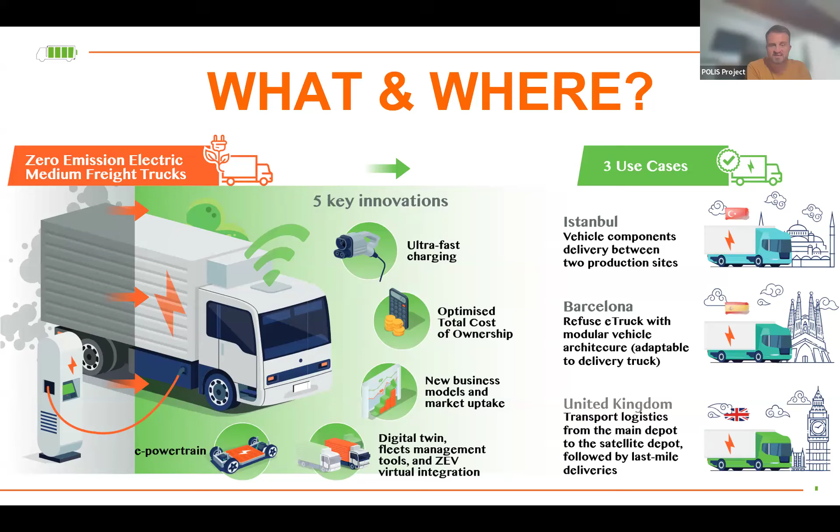We are coming to the end of the project, and we are celebrating our NextETRUCK final conference, where we celebrate the deployment of medium-sized electric trucks across Europe. This final conference will take place on the 28th of September in Brussels, as part of the Connecting Europe Days. It's a joint event organized by DAF and Ford Otosan, since these are probably the vehicles that will be displayed there, and by us from Polis.

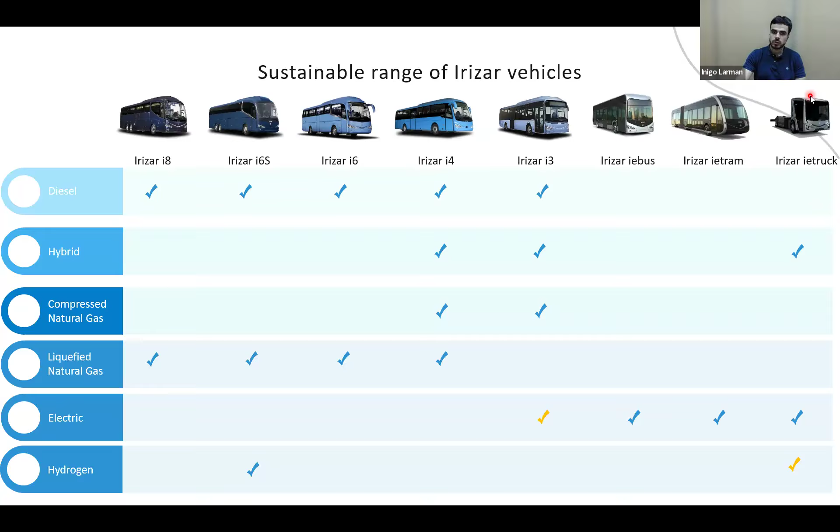This is a closer look at our fully electric portfolio. Now let me focus more on the electric truck, since this is the main focus of the NextETRUCK project.

The Irizar electric truck started as a project as a refuse collection truck, in collaboration with FCC, which is Spain's biggest refuse collection private company. They operate all over Spain and have most of the contracts with different cities. So it was a big partnership between Irizar and FCC, and that's how the electric truck project was born.

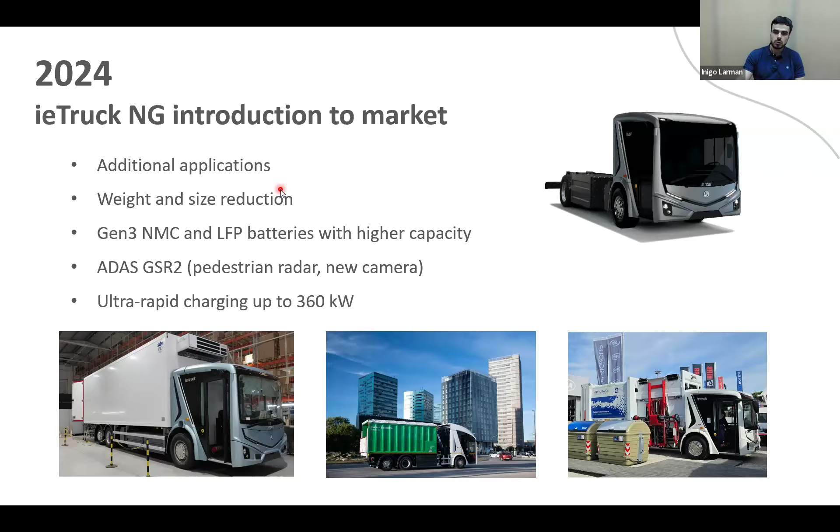Fast DC charging of up to 360 kilowatts. We offer two types of battery technologies, either Gen3 NMC for maximum energy density, or LFP batteries. With this second generation, we reduced the overall vehicle weight by over 1 ton, and we also made it more efficient, so the range was bigger with the same battery size.

Here we can see different second generation Irizar trucks in different use cases, for example urban transportation of goods. They can be cooled or at ambient temperature.

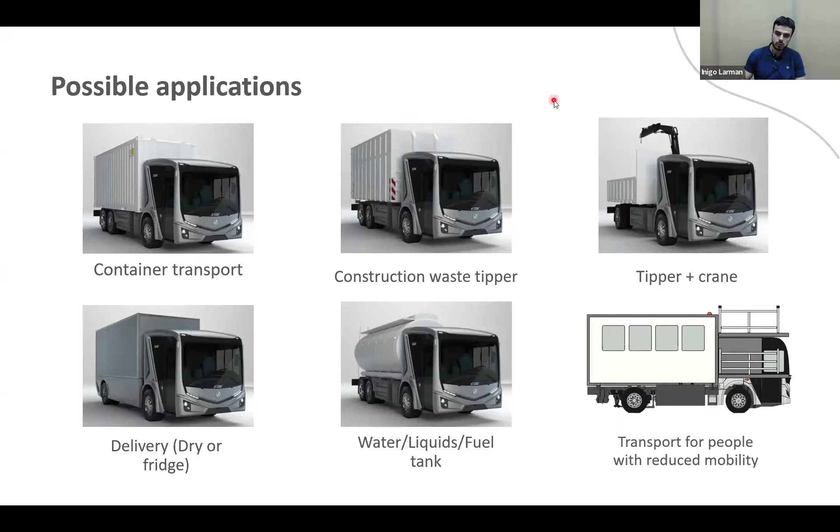As I mentioned, one of our strong cases is that our platform is very adaptable. For example, here we can see a use case where we can transport liquids such as a fuel tank, water, transportation of people with special needs, propane, etc. So our platform is very adaptable to different use cases and needs.

And here you can see pictures of real trucks that we develop and that we have already manufactured, which are already in operation with different applications.

Here you can see more pictures of different applications. For example, this truck is a refuse truck working in Switzerland. This is a truck working in San Sebastian. This one's a refuse truck working. This one's one of the first generation trucks that we started working in Barcelona, and more Barcelona trucks with different body configurations.

So what are some features of our electric truck? It's 100% electric, built from the ground up to be electric. We didn't take an existing diesel truck. Instead, we designed a truck from zero, taking into account that it'll be electric, so we optimized everything for electric mobility. We also used the same technology and architecture already being used in our electric buses, so our truck technology has been tested and validated over 1,500 electric buses currently operating all over the world.

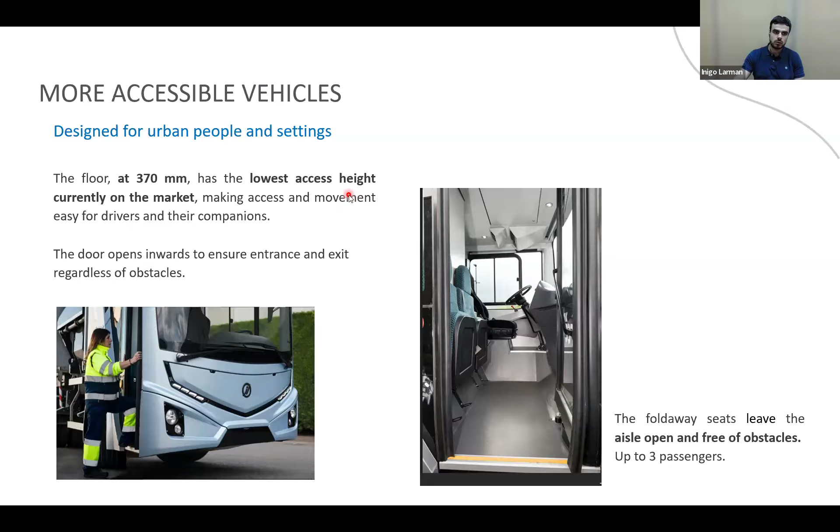Since the cabin is very low and it's all glass, the view is very good, with over 200 degrees of field of vision. So it exceeds what traditional truck manufacturers deliver, because their cabins are higher and their degrees of vision would be lower.

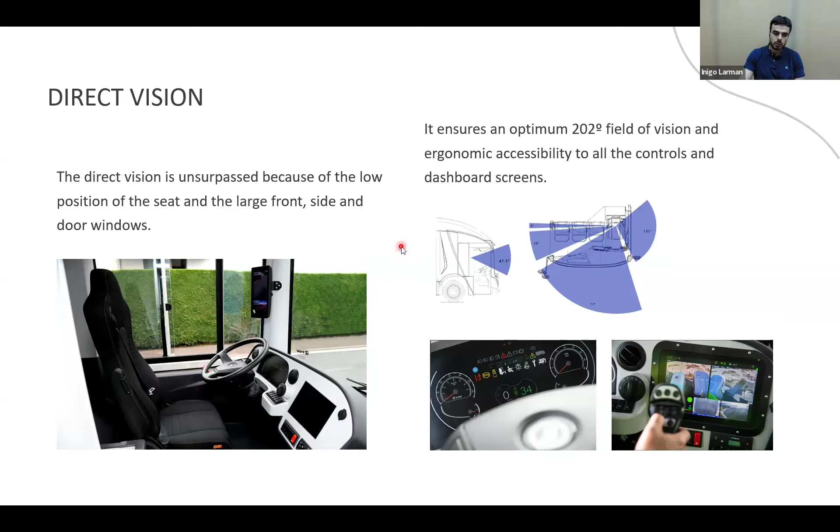Also, one of the key aspects of our truck is maintenance. In traditional trucks, the entire cabin has to tip over to access the motor and powertrain components. However, our cabin stays fixed, and we have big side access doors where a person can get inside and access all the components for easier maintenance, thus lowering the total cost of operations.

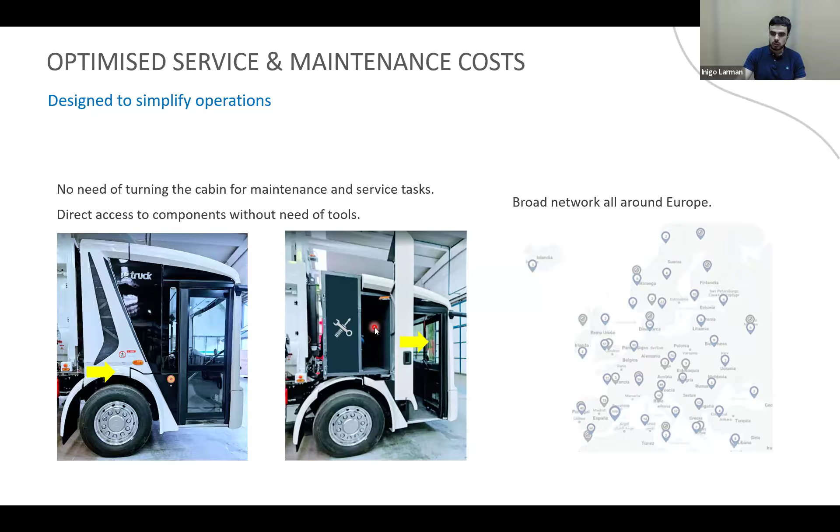One of our key advantages is also the energy storage management. We develop in-house the battery technologies that we integrate in our trucks. All the NMC technology batteries are developed by Irizar and also assembled here in the Basque Country in the north of Spain. So we control the entire supply chain from start to finish in the batteries, which is one of the most important components for electric vehicles.

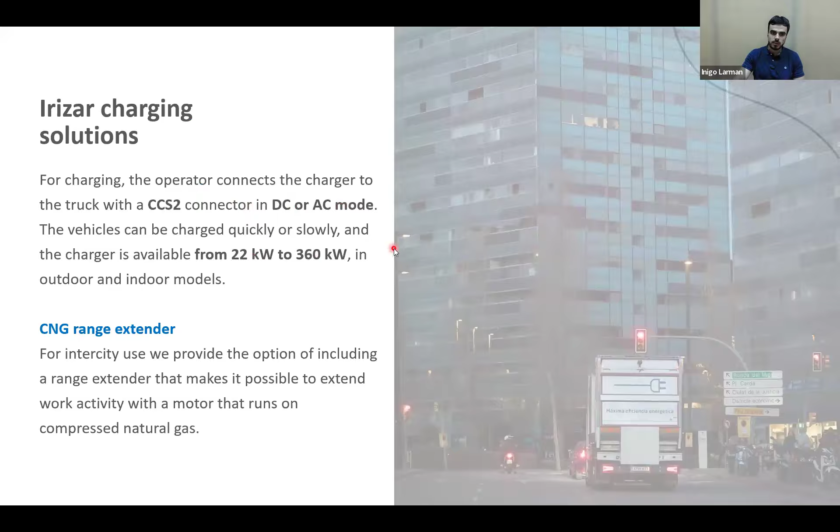We also offer charging solutions. Our partner Jema, part of the Irizar group, offers different charging solutions. Our truck can charge in either AC or DC mode, up to 360 kilowatts. So partnering with Jema, when we sell or deliver trucks to customers, we can sell them as a package, both trucks and charging infrastructure. Here you can see some of our trucks using our charging infrastructure supplied by Jema.

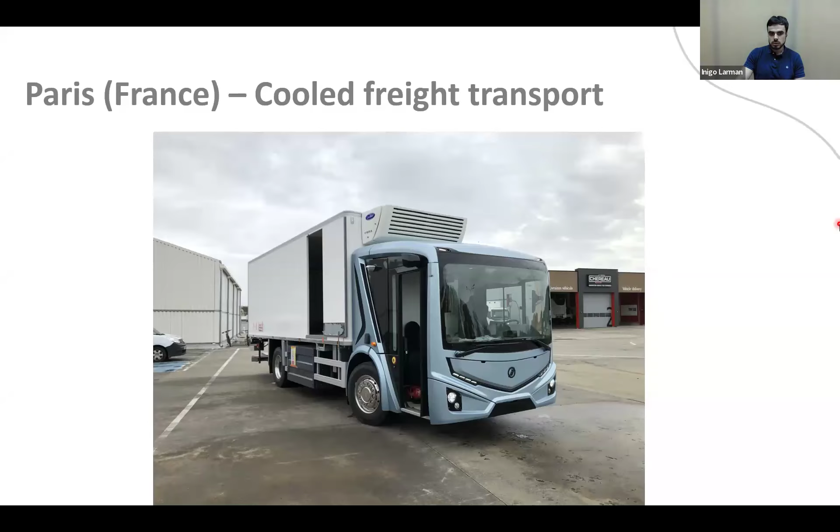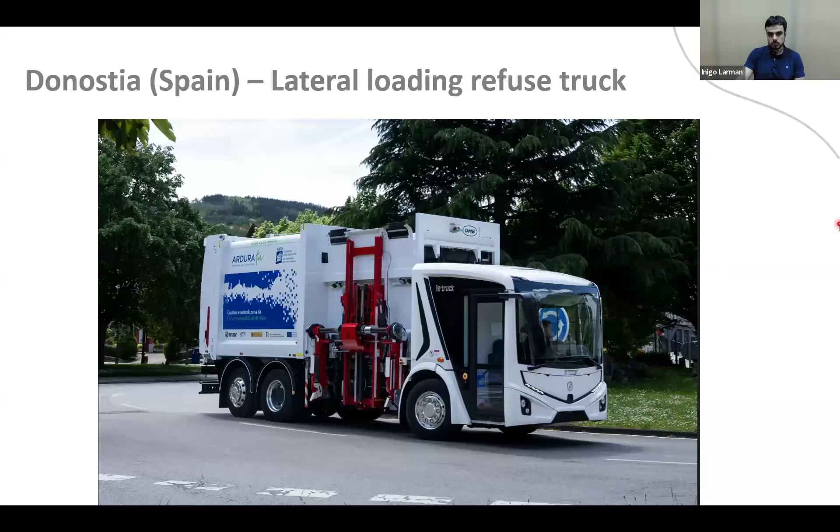Now let me introduce our partnership with NextETRUCK and our involvement with the NextETRUCK project. I'll show first a video we took with the Barcelona use case pilot.

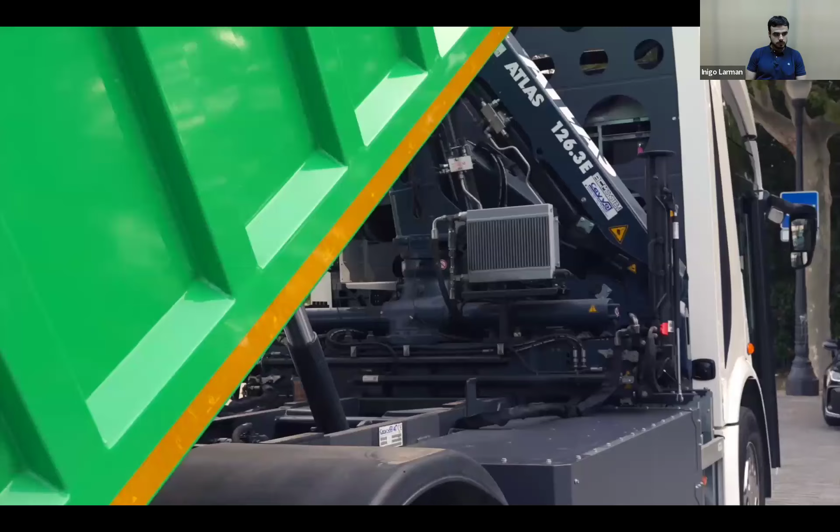This is a common problem, the audio is not being transmitted. Maybe we can show it at the end again, because we can't hear anything and the connection isn't perfect. The connection is not good. Okay, but yeah, we can maybe show it at the end again, and check the settings while we look at the other presentations, because it demonstrates the use case really well. Okay, no problem. Let me continue. Can you see the screen, right? Yes, all good. Perfect, good. Okay.

So some of the truck features that we deployed in Barcelona for the NextETRUCK use case: it's a first generation ie truck already working in Barcelona. It has a 4x2 drivetrain, meaning two axles and one driven axle. It's an N3 category, ranging from 16 tons unloaded up to 20 tons loaded. The bodywork configuration is a tipper open box, so the box can tip for unloading, and it also has a hydraulic powered crane to pick up heavy objects and place them inside the open box.

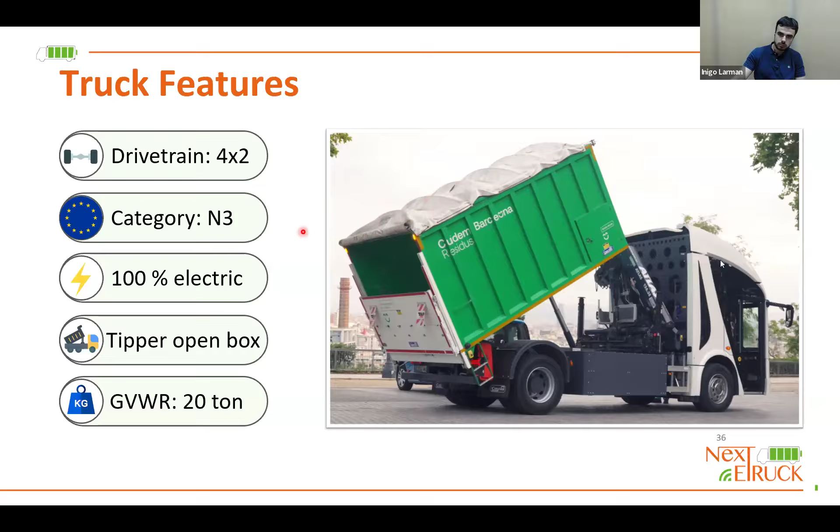What we did is take this existing truck that was operating in Barcelona, and we updated the hardware with different improvements and innovations developed for this NextETRUCK project. One of the main upgrades was updating the NMC batteries to our latest generation, the third generation. This change massively improved the range of the truck because before we had 170 kilowatt hours of energy with the baseline truck, and after the upgrade we improved onboard energy by 80%, going up to 307 kilowatt hours.

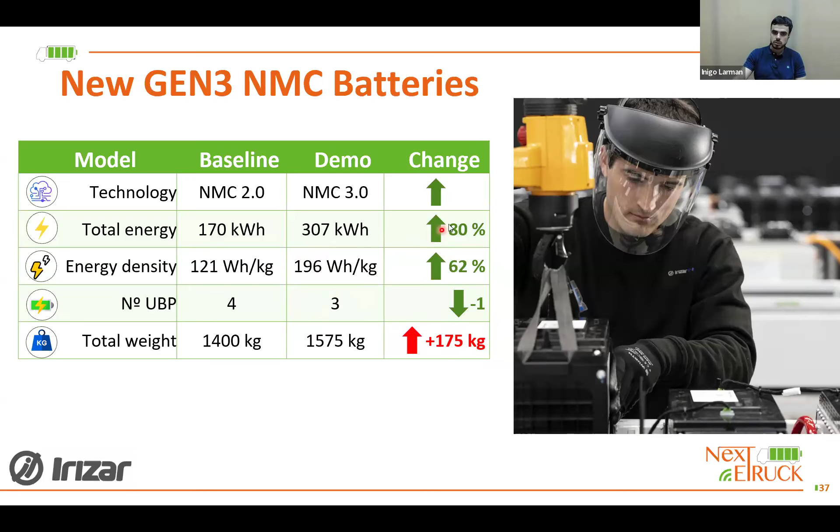These new third generation batteries, developed in-house by Irizar, provide a 62% increase in energy density, and also changed the number of batteries. Before we had four battery pack units for the baseline truck, but with these new batteries, which provide more energy, we only needed three battery pack units. However, since these battery packs have more cells and are more densely packed, the total weight of the batteries increased by about 175 kilograms. This increase in weight was well worth it because the energy increased by over 80%.

What's the advantage of having two systems in one? First of all, the number of parts is lower. Before we needed two compressors for cooling each system; now we have one shared compressor, which is enough to power both systems. This means that with just one compressor, the thermal energy consumption will be lower, and also the weight decreases by around 60% thanks to the integration into just a single system.

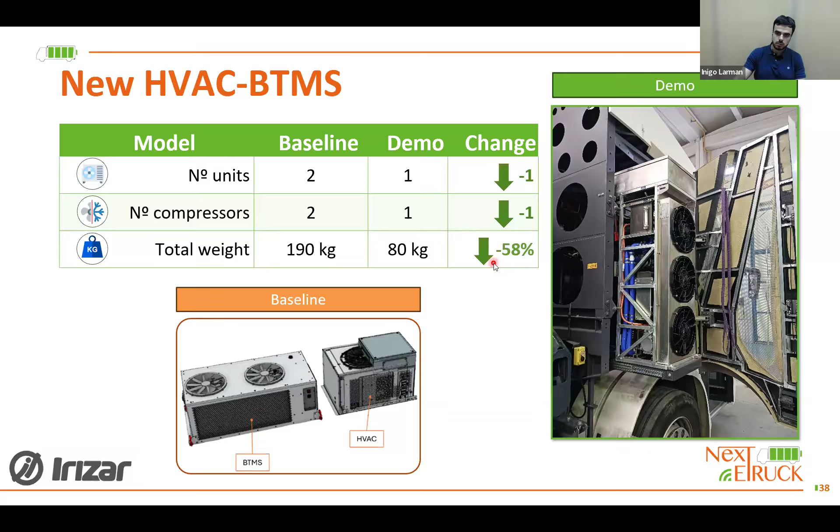Another innovation we introduced was the digital twins for the BTMS control. These digital twins were developed by Tecnalia, and our colleague Beñat Arteta will talk about the details of how they developed this innovation for the project. I'll give the stage to Beñat now so he can tell us more.

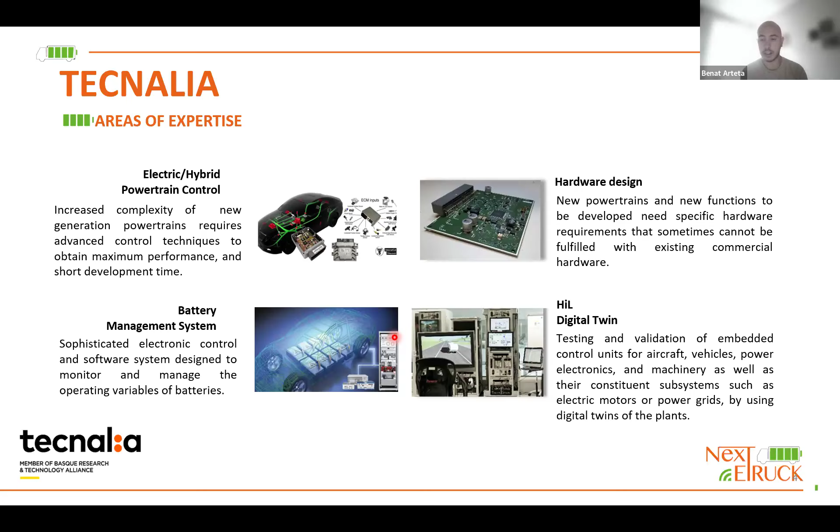With all of this, we have been implementing solutions using methodologies such as hardware in the loop and digital twins. More specifically, I am specialized in digital twins and model-based design, based on MIL, SIL, HIL, or online real-time digital twins, such as in this project, and also cloud-based data logging, computing, and monitoring solutions.

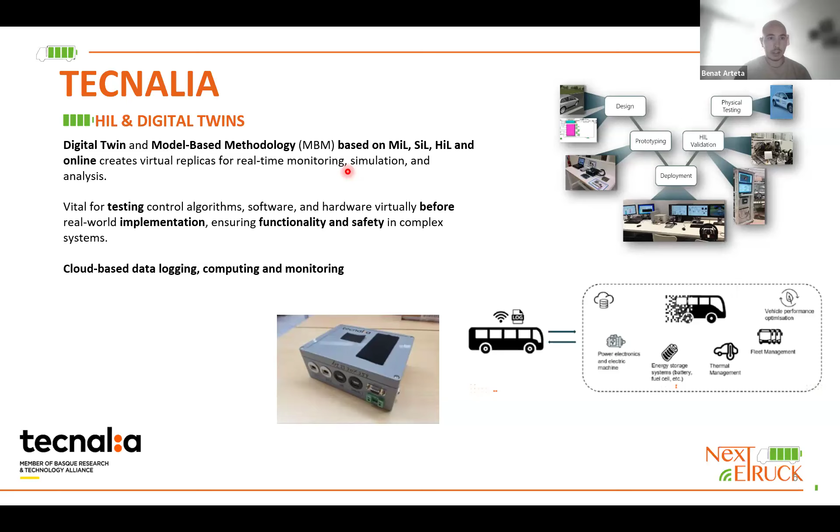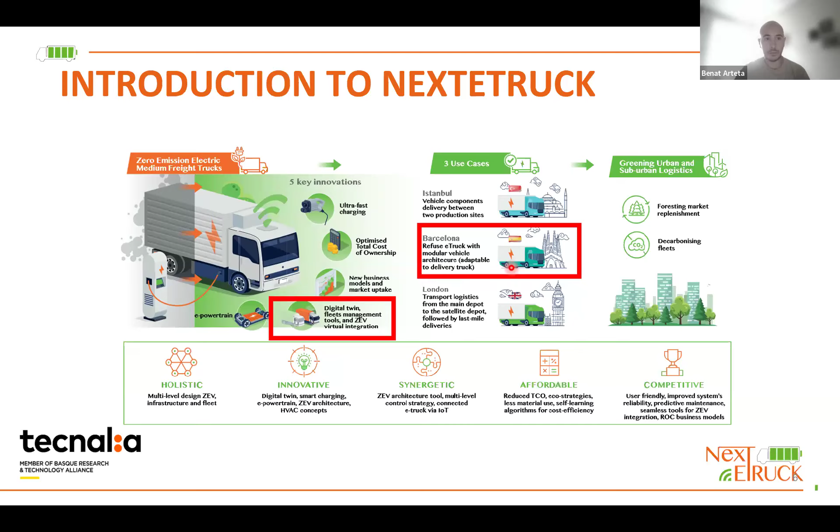So, a brief introduction of what we have been working on within the NextETRUCK project. From Tecnalia's side, we have been working with Irizar on the digital twin of the vehicle, more specifically for the Barcelona use case. The objective from our side was to reduce the truck's energy consumption, and more specifically we focused on the auxiliary systems in the battery thermal management system. To get that energy reduction, what we analyzed and developed was how to get an optimum battery set point temperature.

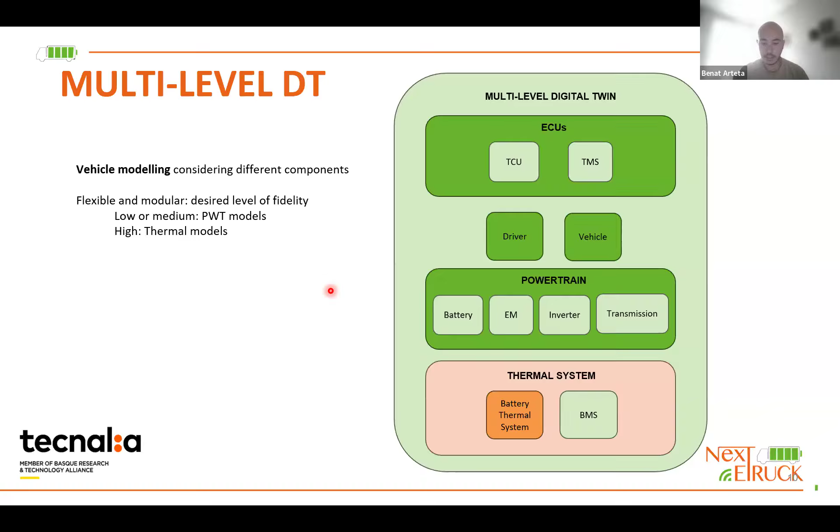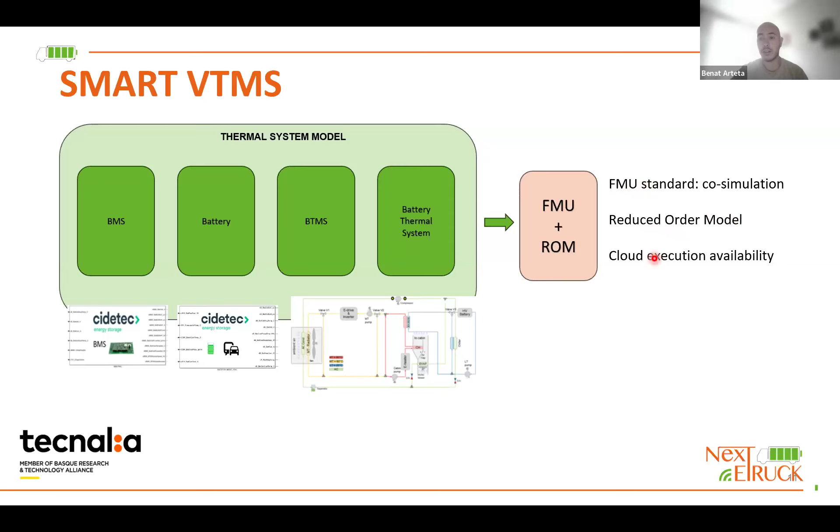So this is the smart VTMS for the part of the thermal system of the vehicle. This solution has been carried out with the collaboration of CIDETEC, which has developed the BMS and the battery FMUs, and the BTMS and the battery thermal system we have developed internally with collaboration with Irizar. And with all of this, we have created the FMU standard for the co-simulations of the different components, and also the reduced order model ROM for the cloud execution availability.

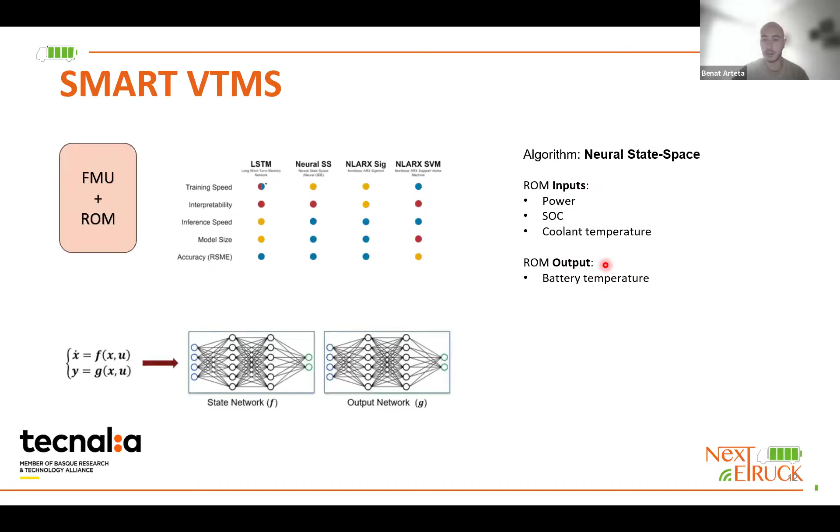In this ROM, what we have applied is an AI solution with neural state space algorithm, in which we have power, SOC, and the coolant temperature as the inputs for the ROM model. And with all of this, what we get as an output is an optimal battery temperature.

This development has been validated in two stages. First of all, we did it in a hardware-in-the-loop solution, integrating the multi-level system control and the thermal system models inside the real-time machine, which is the SpeedGoat from MathWorks. And once we validated in the real-time machine, we did the same validation in the cloud server of Tecnalia Katea.

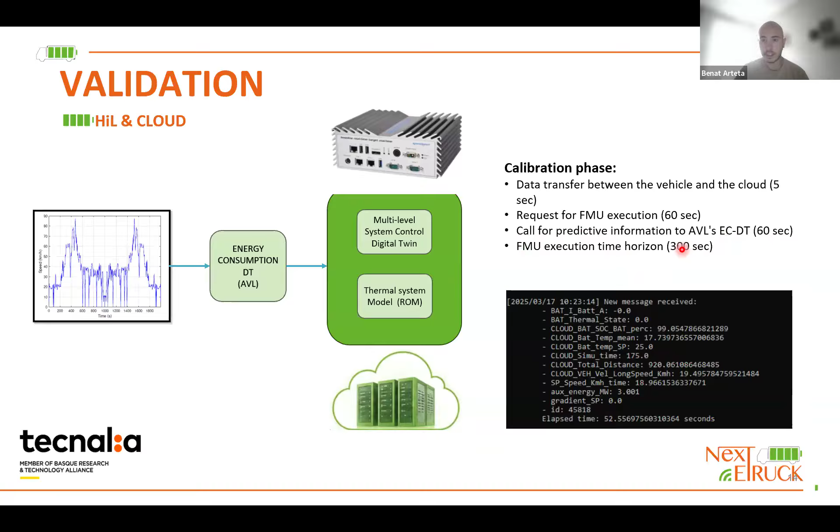For the validation stage, we did a calibration phase in which we have to take into account the execution time that is required for the solution. We have established the data transfer between the vehicle and the cloud at 5 seconds, the FMU's execution at 60 seconds, and the call for the predictive information to AVL's energy characterization digital twin also at 60 seconds, and the total FMU execution time horizon at 300 seconds. So once we have calibrated all these different phases, we have reached these results.

So we have here two different images. On the left side, we can see the Barcelona use case profile used as an input for the solution without an optimal battery temperature set point. In this graph we have the BTMS compressor electric power used. We can see that the maximum power required is around 1,300, and it's activated at around 300 and a half seconds.

And on the right side, we have the same profile from the Barcelona use case, but in this case we are using the optimal battery temperature set point. In the same graph, we can see that the compressor is activated later on the x-axis, which is the time of the drive cycle. It's now activated around 650 seconds later, and the maximum point of the electric power is less. So with this, we conclude that using this optimal battery temperature set point will reduce the consumption of the auxiliaries, such as the battery BTMS system. We consider this part of those auxiliaries.

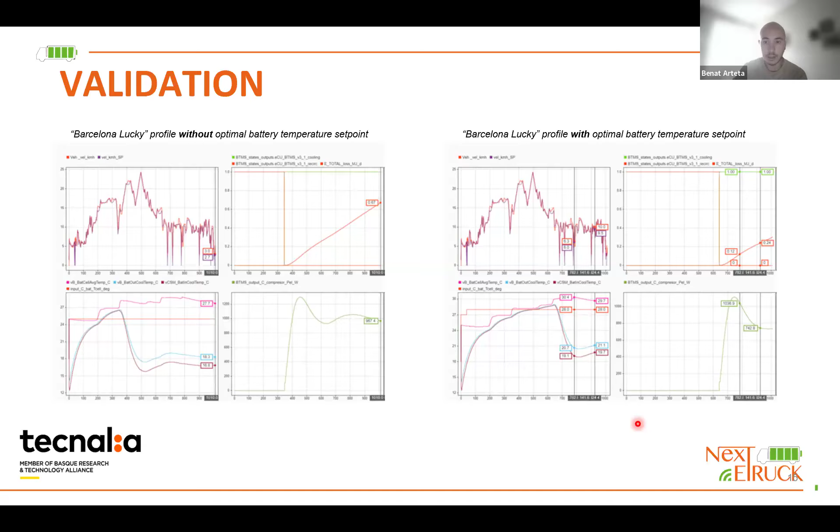So when we finish the validation part on the HiL and the cloud, we integrate all of this in the vehicle, in the Irizar's vehicle in the use case, having on one side the logistic planner to know the route and the AVL characterization for the power prediction of the vehicle in that specific route.

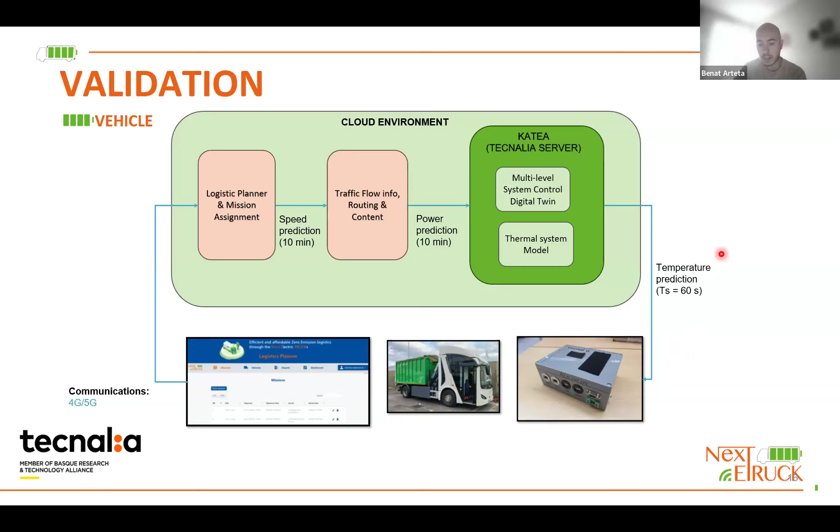We have executing KATEA Tecnalia server, which does a prediction of the optimal battery temperature that goes through wireless communications, 4G and 5G, and enters in the vehicle through the IoT device. And in this case, the final results of the operation is going to be explained by my colleague Inigo from Irizar. So this is all from my side.

Inigo, the floor is yours. Maybe you can explain further the vehicle generating results. Okay, thank you very much, Beñat. I'll continue with the presentation.

So yes, Beñat was talking about the digital twin that was being executed on the cloud server and how the truck would communicate with its servers. And one of the devices, or the input devices, that the driver could communicate with these digital twins was the IoT-based navigation.

Another change that we performed in the Barcelona use case: FCC, the refuse company that would operate this truck, already had several electric chargers. However, these were only 50 kilowatt chargers. For this project, one of the innovations was about electric chargers, and our partner Gemma installed 180 kilowatt chargers, more than 3 times the power capability of the original chargers, and these new chargers also had data logging capability to record all the charging sessions, the energy used, etc.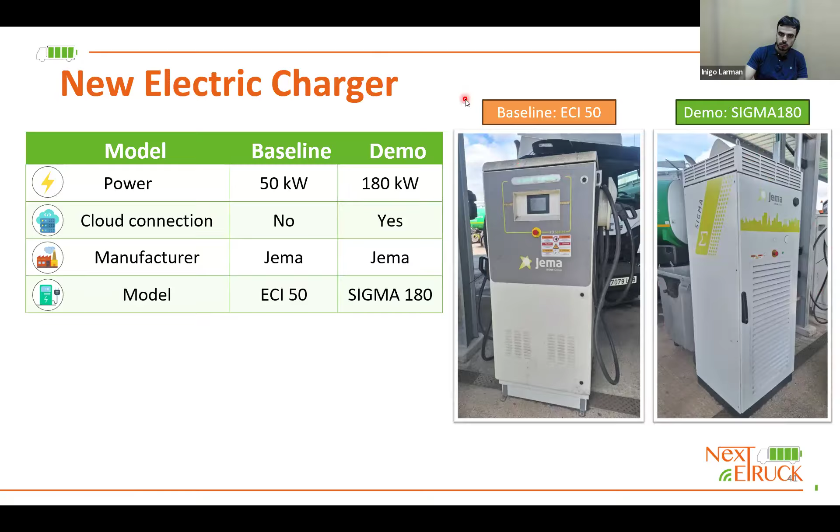Talking about the operations in Barcelona, the truck operated doing bulky waste collection. This is refuse like old sofas, fridges, etc., that are left in the streets of Barcelona at different pickup points, and the truck goes to these specific pickup points when it is needed, because the town hall or the FCC receives the need to pick up at these points, and it mainly operates in the night shift.

The length of these journeys has been around 60 kilometers to around 110 kilometers, and the duration of the Barcelona pilot was 6 months, where we collected all the data of the operations and compared it with the baseline truck, which we already had data to use as a reference point.

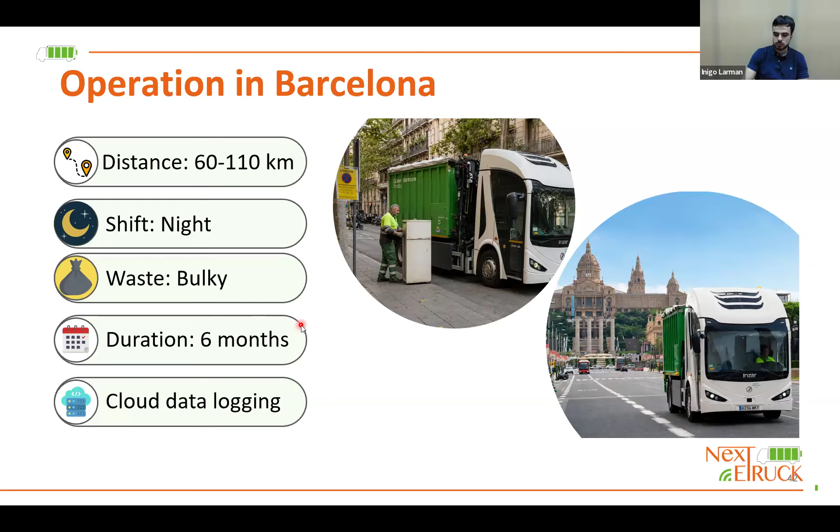Here you can see on the left a real example of one of the routes that it performed, where the pickup points are all located in the city center of Barcelona, and the truck goes to the south of Barcelona to dump all the waste at a recycling center. And on the right, you can see a heat map of the 6 months of operation of all the streets that the truck visited and the most frequented streets. As you can see, it covered a big part of Barcelona's city center.

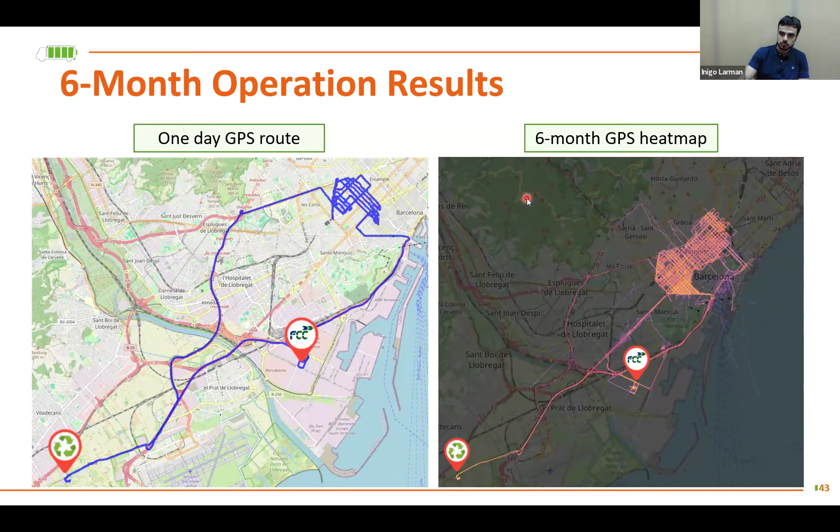Talking about different metrics and operational KPIs that we measured during the operation, looking at the data, what we saw is quite a high variation on the route distance. As you can see on this first chart, these are the kilometers performed each day, and there's quite a lot of variation. This is explained, and this is normal, because with bulky waste collection, some days you can have a lot of pickup points, and some days the pickup points are fewer, so this explains the high variation in the distance covered each day.

Regarding the daily battery energy consumption, we've seen that it's proportional to the distance covered. So longer distance, we've seen a proportional increase in battery consumption.

Regarding the efficiency, here you can see the evolution of the efficiency throughout the months, taking into account that the demo started operating in September and finished in March. In this pink graph, you can see the evolution of the average ambient temperature in the night shift of Barcelona. As you can see, in September it started in hotter weather of around 25 degrees Celsius, and in winter the median temperatures went down quite a bit to about 12, 10 degrees Celsius. This is an important point because we've seen a big correlation between overall efficiency and ambient temperature.

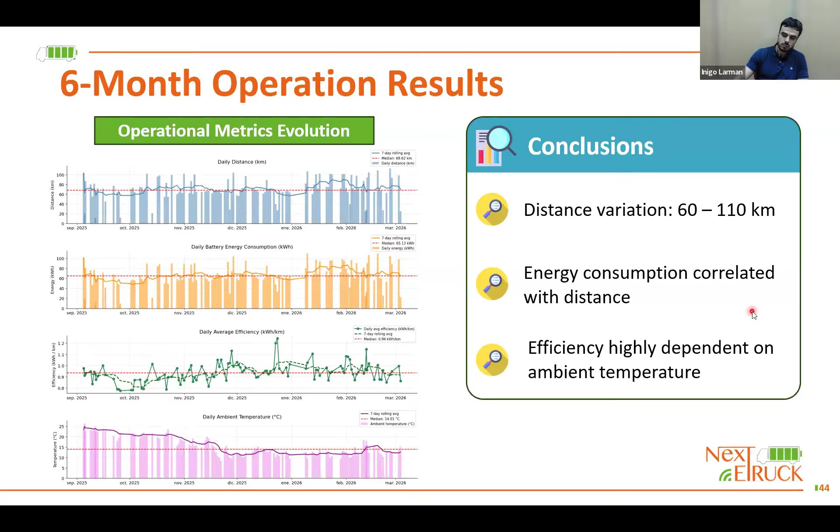One of the key points of this efficiency was the BTMS digital twin control that Beñat already explained. Here you can see a snapshot of a chart during the Barcelona operations, where the blue line was the temperature goal that our traditional electronics was sending to the BTMS, and in orange you can see a higher set point temperature sent by the IoT device by Tecnalia. Since the temperature set point was higher during the operations, we saw a decrease in cooling energy consumption. So one of the reasons for the efficiency increase was thanks to this digital twin integration.

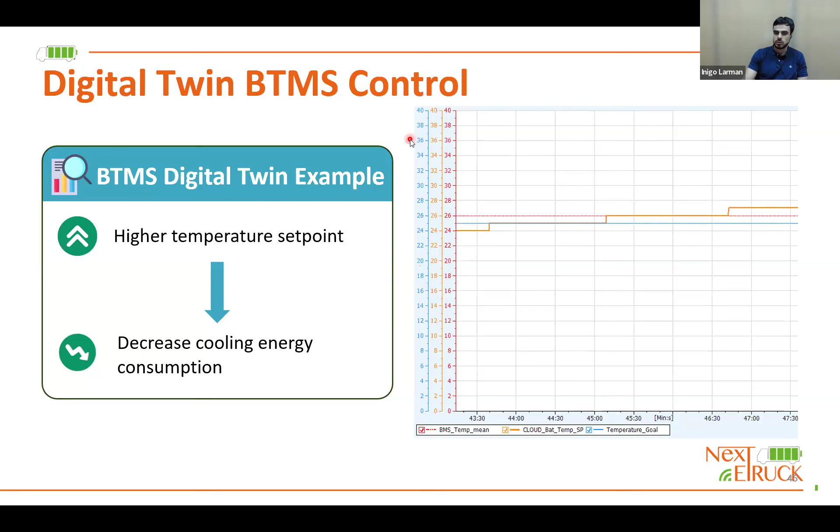Regarding the efficiency and comparing it to the baseline data, on the left you can see data we collected on the baseline vehicle, and on the right on the demo vehicle. Since the efficiency was so dependent on ambient temperature, we compared the same time period with a similar ambient temperature. For example, the baseline data is from May 2024 to July 2024, so it operated in spring and summer months.

So we had a median temperature of around 24 degrees for the baseline. And I took the September to end of October period of the demo data, where we had a median ambient temperature of around 22 degrees, so we could compare similar ambient temperatures. What we saw is that the demo had an overall efficiency improvement of 7.5% compared with the baseline data.

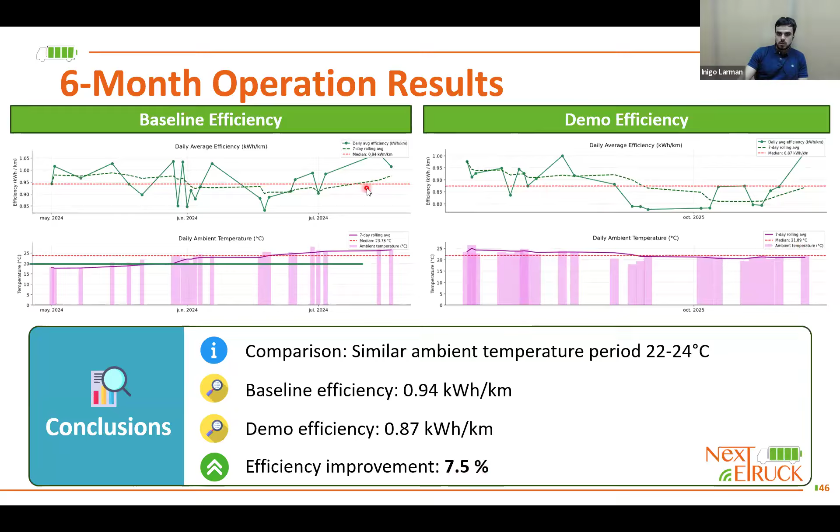Regarding the overall energy breakdown, the top chart represents the baseline energy breakdown, and the bottom chart represents the overall energy breakdown per system for the demo. What we saw is that traction energy, the energy used by the electric motor, accounts for 71% of the total overall energy. The PTO is the small electric motor used by the crane and the tipping system. We saw very little use of the PTOs, just a few minutes per shift, which explains why the PTO use was less than 1% of the overall energy.

Regarding efficiency during the winter months, we saw a higher use of BTMS heating consumption during the demo due to the colder winter nights. And in the demo, thanks to the new BTMS integration, we saw a decrease in low voltage consumption from 19% to 12%, thanks to the new BTMS, which is powered directly by the high voltage battery instead of the low voltage systems.

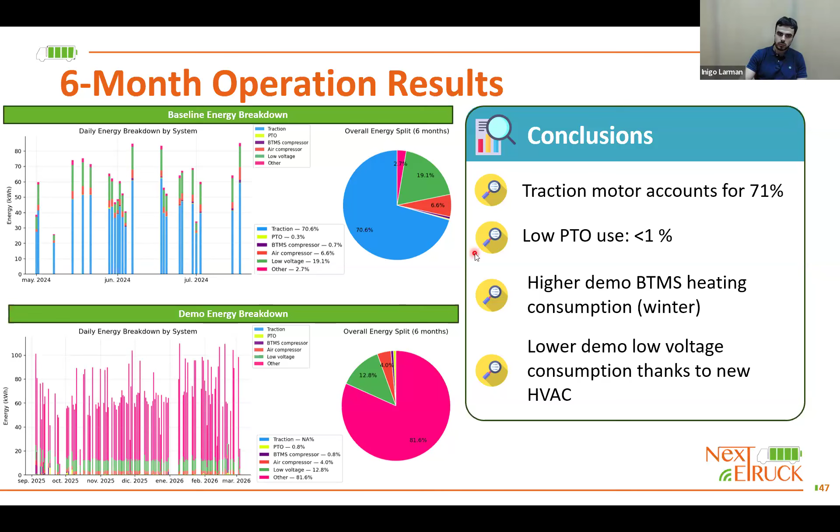Finally, to summarize all the improvements that our client FCC and the impact that this project has had over this existing truck: we saw a decrease in consumption of 7.5%. We also increased the range by more than 95%. The original truck could do around 180 kilometers, and with these new batteries and the decreased energy consumption, it can do around 350 kilometers.

These two improvements mean a reduction of total cost of ownership thanks to the lower energy consumption. This means the operator will use less energy charging the trucks. Also, reduced maintenance cost since the new BTMS has fewer parts, it's newer, and we renewed the battery, so the cells are new, giving the battery over 10 years of useful life. We estimate a 15% total cost reduction this year.

Also, one of the big improvements is charging time. Before, with the original chargers, our customer would need around 5 hours to achieve 80% total energy. However, with this new fast charger, we can achieve the same state of charge in just 1 hour and 20 minutes, an over 70% improvement in charging time.

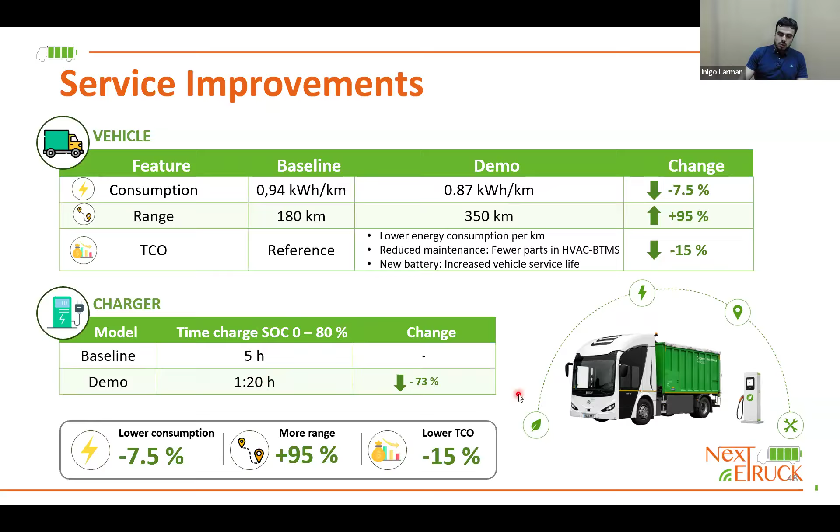Thank you very much, Inigo. This was very, very interesting, and also this was, at least for me, the first time that I saw these numbers, the results.

So when we look at the lower TCO and the significantly increased range in comparison to the baseline that we have expected in the beginning of the tests, did the operator say anything about the performance of the vehicle and the crane, or the usual day-to-day operation?

No, in fact, the operator was quite happy because the new batteries turned out very well. We didn't have any breakdowns during the 6 months. The truck operated without stops, and we didn't have to do any services or have any malfunctions. So the operator was very happy with the improvement, and also very happy with the range improvement.

So with these new batteries, this means that in theory, they would be able to do 3 consecutive shifts without charging. It is true that with the current necessities, they only do 1 shift per day, but now this has brought the opportunity to do consecutive shifts. So they are quite happy about this.